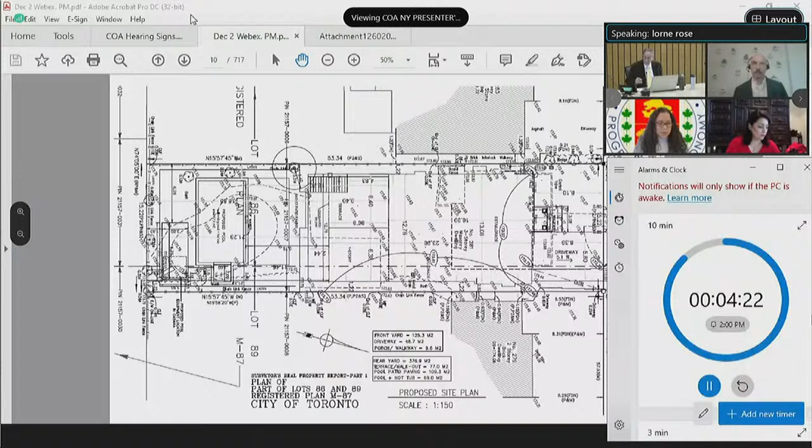The letters of objection are from people who live on the street behind and further west. The concern seems to be about drainage and the big excavation, but the committee doesn't deal with drainage. This does meet the 4 tests of the Planning Act. Planning has no objections. That's it. Thank you. I can answer questions.

Very good. Thank you. That's a short presentation. Okay. Any question? Can I have a motion, please? Ms. Sankar? Yeah, through you, Mr. Chair, I think I understand what's happening with this application, and I do agree with the agent. I feel that given the explanations provided, I'm willing to accept this application. So I'll put forward a motion to approve this application without conditions. No condition. Thank you. Second, Ms. Satarodi. All in favor? Okay, thank you. Your application is unanimously approved with no conditions.

Item 16, which is 30 Newton Drive, application number 16. And here we have David Eagleman. Are you there? David Eagleman? Good afternoon, hi. Sir Chair and fellow committee members. Could you please repeat your name and give us your address? Yes, through you, Mr. Chair. My name is David Eagleman, 900 The East Mall, Suite 300, and I am the agent on behalf of the owner.

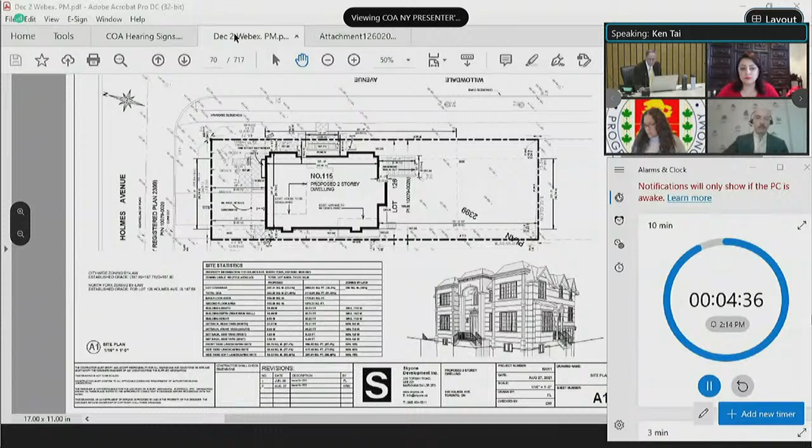Okay, so when we look into the site plan, it is a corner lot, and again number 1 we're going to eliminate. Number 2, talking about the height, if we go look at A9, which is the elevations, the staff report also mentioned that our main roof and main wall height is actually 7 meters. It's only the dormer that exceeds the height, so we would like to follow the staff recommendations. If you want to tie into the design for what we're asking, we're willing to do it.

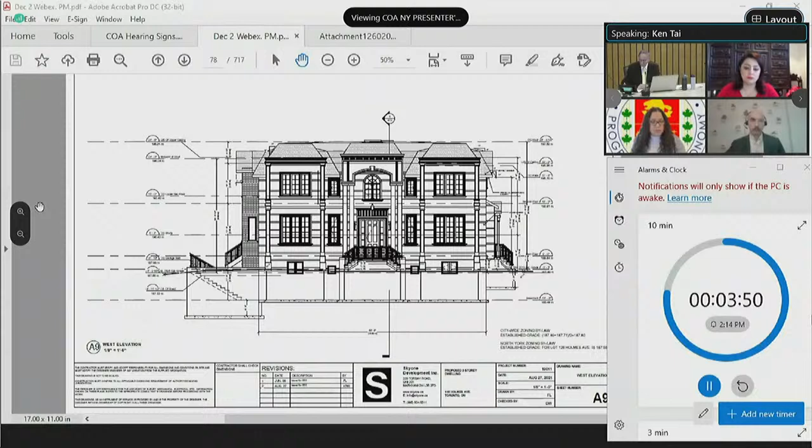And then for the lot coverage, we're willing to drop it to 32%, making the building smaller. And number 7, I want to mention, about the parking, that side is actually existing conditions, we're just putting it back in the existing driveway, that's all. So I'll just make it brief. That's it, any questions I'm willing to answer.

Thank you. Members, any questions? If not, can I have a motion? And you've got the changes there. Anyone for a motion? Okay, again I have 2 motions. Ms. Sankar, go ahead please.

Through you, Mr. Chair, I believe that the explanations provided by the agent here today and the changes that he's made does make me feel that this meets the 4 tests. So I'll put forward a motion to approve this application with the changes made by the agent here today, in that variance number 1 is eliminated and variance number 6 is reduced to 32% to meet the staff report, as well as the proposal be developed substantially in accordance with the east-west elevation drawing submitted to the committee. That's my motion.

Thank you. Second, Mr. Klassen. All in favor? Thank you, okay, unanimously approved based on those changes and the staff condition.

Number 18, which is 146 Castlefield Avenue. And here we have...

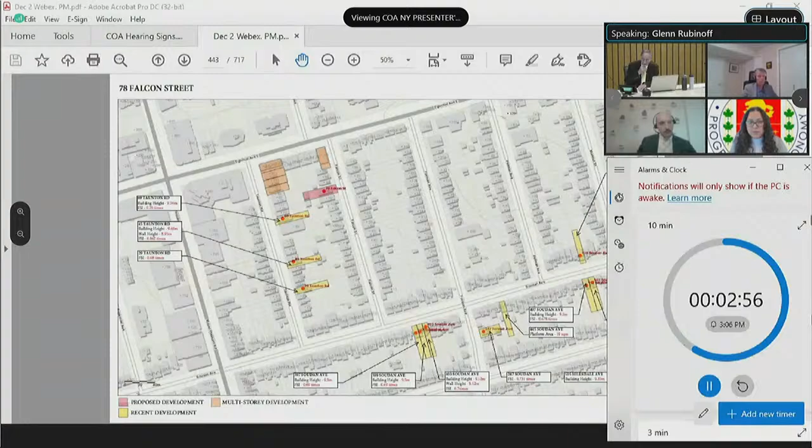Okay, so just before we move on, the application said 4-story and you say it's only 3. So I understand it's because of the basement, it's technical. But the way it sounds, it's only 3-story, because here it says 4-story. That's number 1.

Okay, number 2, could you tell us what you're changing to what? State what you're changing. So variance number 1, the proposed request is for the size of the platform. It was requested at 13.3, and we're reducing it to 9.9 square meters. That's the change you make, and there is a condition there.

Okay, so we have one more person here to speak, and we'll move on. Here we have Roseanne Flower. Are you there? Yes, I am. Okay, hi. Can you please state your name and address so it can be recorded? Sure, my name is Roseanne Flower, I'm at 79 Taunton Road.

Yes, so I just wanted to get a better understanding of what it is that's proposed, and I think I do understand now. It's just that you're adding a small loft on the top of the building, and you're reducing the size of the terrace. So I have no issues at this point.

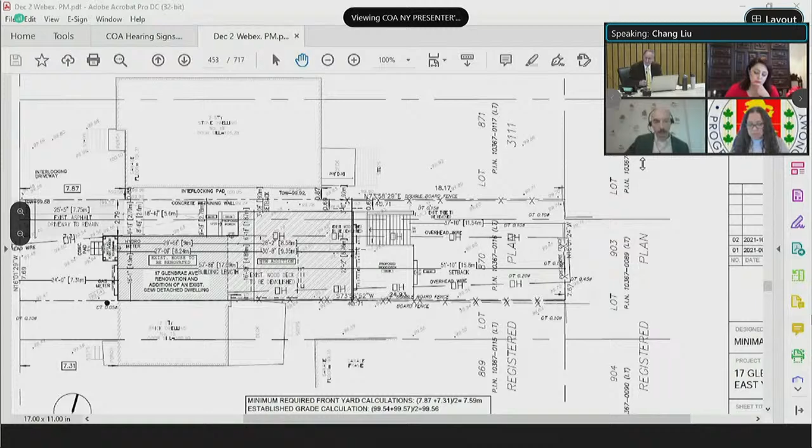Thank you, committee. We are residents and owners of 15 Glenbrae Avenue. We are the attached neighbor of the other half of the semi-detached unit, just below 17 on the graph here. So we have a few concerns with the proposed expansion, especially with the variances.

With regards to variance number 2 and variance number 1, it will take up a lot of the existing green space. I have lived in this unit for many years, and every year in early spring we experience significant flooding because of a drainage issue whenever there is significant rainfall. We're very concerned that with the addition, especially with the variance, it will have a negative effect on the existing drainage problem.

Our other concerns are with regards to variance number 1, and especially variance number 3, the proposed building height. We're very concerned because our rear-facing rooms - the proposed expansion, especially with the variance, will be sitting exactly where the sunlight usually comes into those rooms, and it will block a significant amount of direct sunlight for a large portion of the year. Related to that, we're also concerned about privacy in both of those rooms with the expansion.

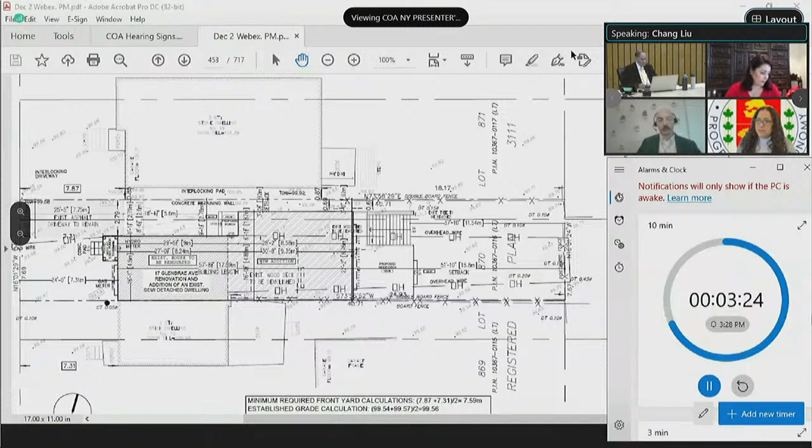That mostly covers our concerns so far. Thank you for hearing us out. Okay, any questions for the speaker?

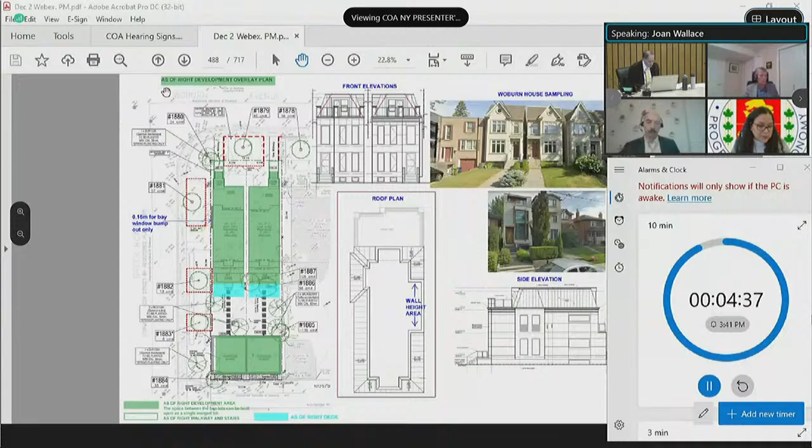This is Donald Lamont, can you hear me? Yeah, I hear you. Do you want to add something in addition to Mr. Romano? No, I'm here with Joan Wallace, one of the owners, and the only reason we're here is we were told there was a request for a deferral, and we would speak to that if the committee is considering it. But otherwise we have nothing to add. Right now we're just considering the application, so there is no request for deferral - the agent does not request the deferral. So we're going to go to the next speaker and see what happens.

We have here Janice Toms and Robert Kidney, are you there? Janice Toms, are you there? Mr. Chair, we do not have a Janice or a Robert on the call at the moment, either by name or number. So maybe we'll come back to it at the end. If they show up, let me know. Thank you.

Okay, we have here Holly Shonaman, are you there? Holly Shonaman? Yes, I am here. Holly Shonaman, 203 Woburn Avenue. Thank you, can you please tell us what's your concern about this application?

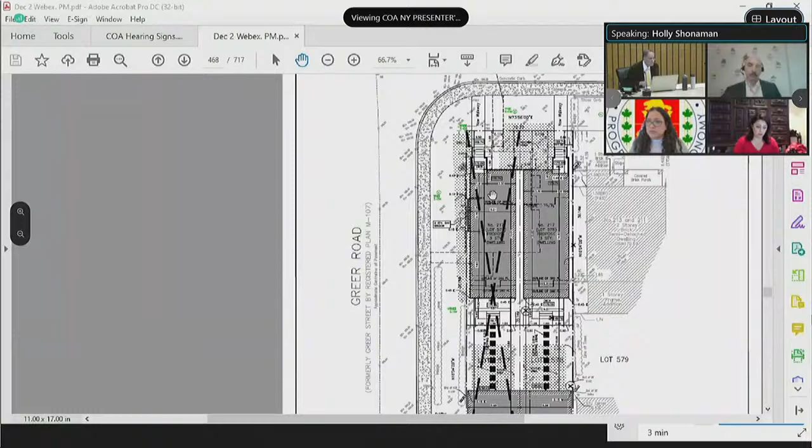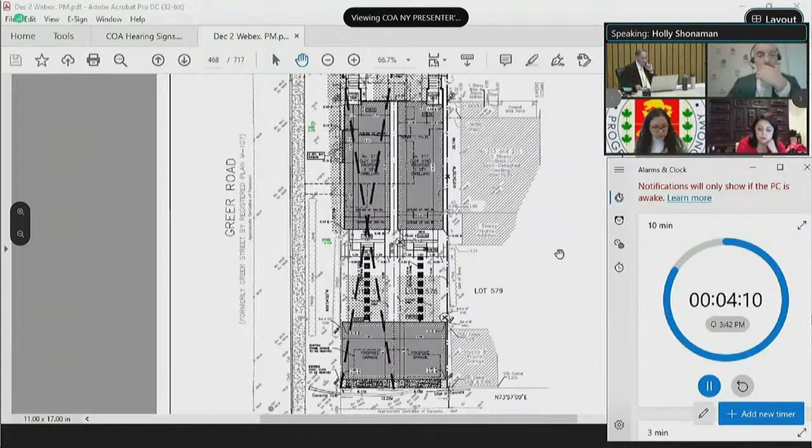Well, one of the things I will say is that there were several mailings on this, none of which described the roof slope, so that is new information, and that is helpful. It is the height of this building combined with the proximity to Greer that I find objectionable. Now I'm talking about 577, which is the Greer-facing building. I feel it's not in keeping with the residential character of having trees and lawns, and I feel that it is not a minor variance to go to 0.15 of a meter on a 3-meter variance. I don't think it's an appropriate change for the neighborhood. And this garage is already where that laneway is, and people pulling out of that laneway is already a challenge because there's a lot of kids using that road. So as that garage is built up, because the existing garage is just a very small building, I think that's going to create a danger for traffic and pedestrians where the cars will have to pull out quite far into the sidewalk to see up and down Greer.

Okay, yeah, you mentioned 577 - that was the next application. But we are currently in 578. But you know what, I think we're going to change it. Mr. Romano, are you okay if we take both of them at the same time? Happy to, sir. I just did not speak to that setback, so I'll speak to it in response later on. But you're okay to address the two applications together? Yes. Okay, because originally I said no since the list had changed, but all the ones speaking on 578 are the same ones speaking on 577. Okay, it's okay sir, you're just keeping me on my toes.

No worries, thank you. Okay, Holly Shonaman, any question for her? No? Okay, the next one is Adam Weingarten, are you there?

Adam Weingarten? Mr. Chair, we do not have an Adam Weingarten present either by name or by phone number. Thank you, in case they come, let me know. Okay.

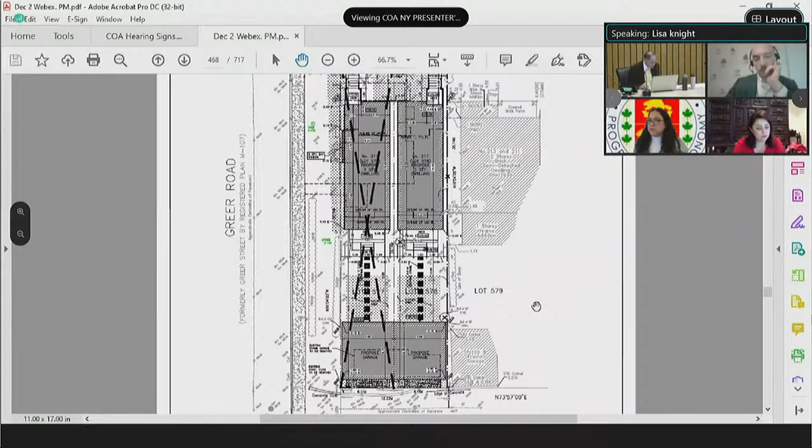They're the same, so for context, this is a corner home, so particularly concerned about 577. So a couple of things on that. First, with Variance 3, environmental impact, there is a mature tree on the lot that will either be severely injured or cut down to accommodate construction, especially at that height, from what I can tell.

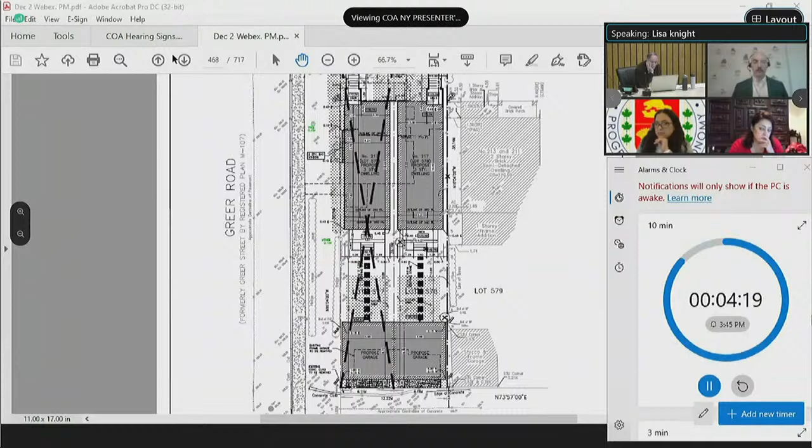Number two is Variance 4. Similar to Holly, just want to emphasize these laneways have to be thought about more. It does create a safety risk. We have a high traffic of students, parents, kids going both ways up and down, up to John Wanless Public School, going down to Lawrence Park and Glenview for school on a regular basis. There is laneway visibility already reduced from parked cars, and it just adds to the lack of it. We had a house change just on the other laneway, which continues to cause issues where you cannot see people.

It poses a big safety hazard. So the combination of the environmental impact and the safety hazard on this corner lot has to be thought about carefully, and just want to be sure that we're not eroding the character of this neighborhood and we're not creating safety or environmental issues. Thank you.

Thank you, any question for the speaker? No? Okay, so no one else showed up? No. Okay, all right. So Mr. Romano, could you come back please and make any comments you like about the two applications?

Yes, thank you Mr. Chairman. I'd like to see slide number 1 again please. So the setback that is being requested is only for the west lot, so that's 577, and it is for a window bump out.

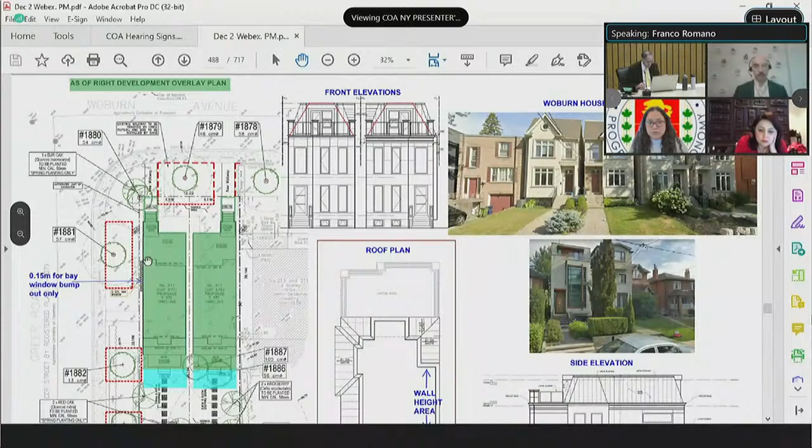On the left-hand side, you're going to see in blue text it says 0.15 meters for the bay window bump out only, and that bay window bump out is shown in a black and white or checkered rectangle. So the balance of that side yard setback is zoning bylaw compliance. You'll see that 0.15 meters is within the building length and does not project out towards the front, and does not affect sight lines and does not affect the city tree.

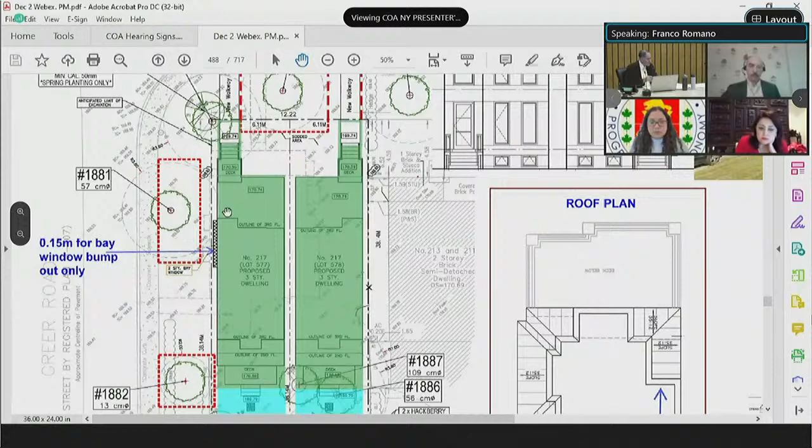The city tree that's next to it, you'll see is tree number 1881, and that is to be protected. We've worked with urban forestry in order to ensure that tree is being protected. So the majority of the trees are being protected. If we look at the lower right, that essentially bay window is those, you see those 4 vertical windows, that's correct. Thank you kindly, and I couldn't do this much better if I was live here.

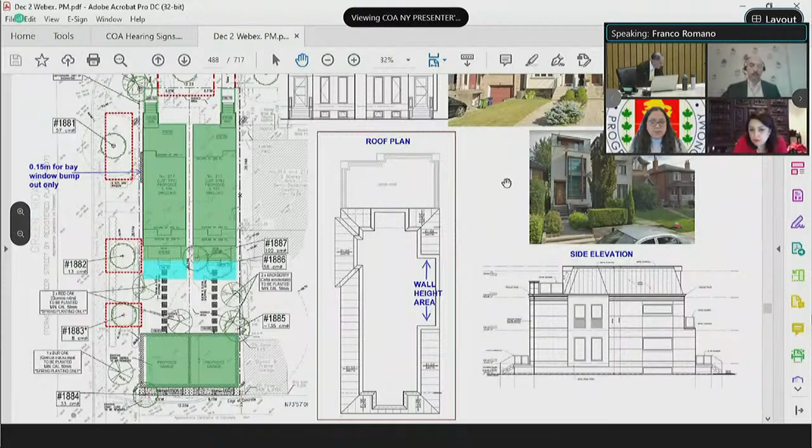Thank you, that is the 0.15 meter setback, so it doesn't even go to the ground. It's basically a bay window that has a 2-story component, and that's why there's that setback. So I think that was the concern that was raised by both persons that spoke. And the overall height is actually zoning bylaw compliant, and as I mentioned, the wall height is in between the 2 dwellings.

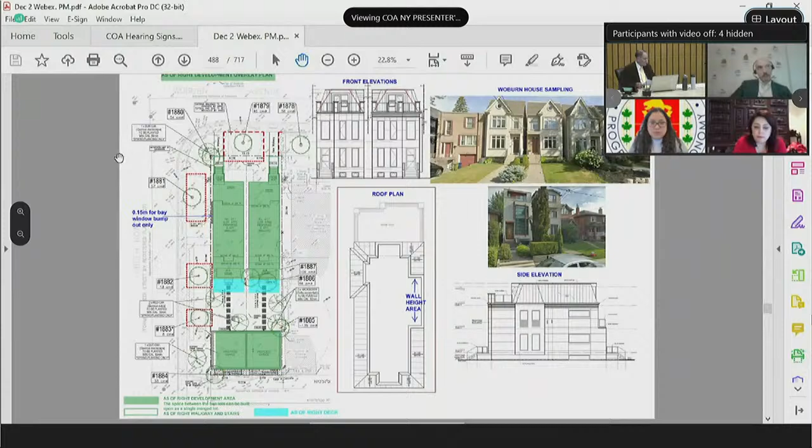So the wall height is not to Greer Road, which is to the west, and it is not to the eastern side to number 213. And by the way, 213 Woburn actually is written in support of the application. So I submit that there is no tree impacts, and the setback is definitely minor. But for the fact that it's 2 stories, it'd be permitted to have that as a bay window at any event. Subject to any questions, sir, I'm happy to assist again.

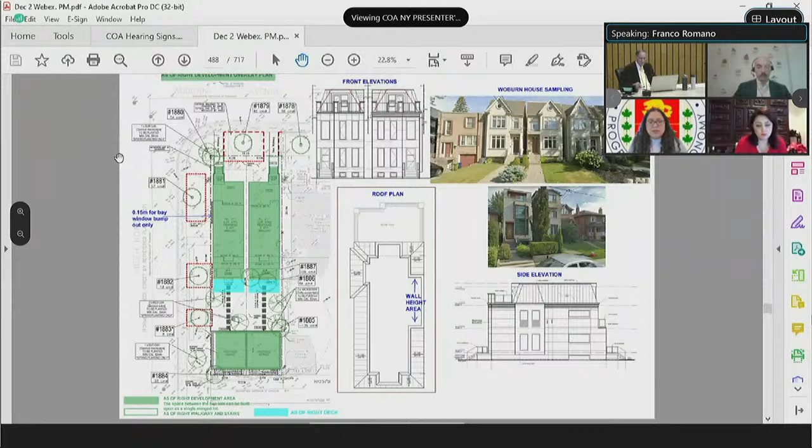Thank you, any questions to this agent? Miss Tarodi? Through you, Mr. Chair, it's not a question, but just a confirmation that the bump out on the west side is related to lot number 577, application 33. Correct. Thank you, yes, that's a question.

Miss Sankar, question? I have a question too, sir. I'm sorry? Judging from the photos, I'm seeing that this house, I guess what I want to ask is if it was left as is, is this also a sort of a safety hazard in the way that I've not seen photos like this before where it does look like it's falling apart? The structural integrity of the existing house has been compromised.

Yes, there's a structural report, and you'll see some photographs on file. So there would be some substantial work involved, if not removal, in order to make sure that at least part of the building would remain, certainly not its entirety. So yes, it is structurally compromised right now. Right, so that's a safety risk to not do something about this one. Yes, I would agree. Okay, any other question?